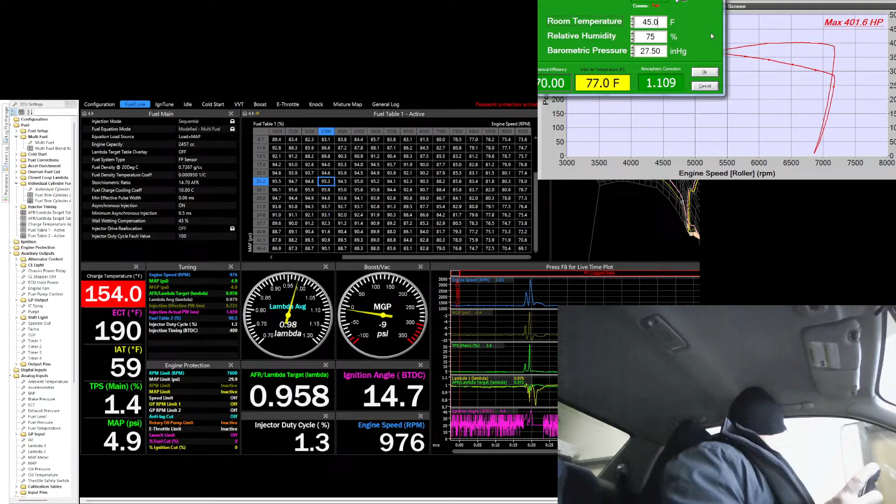I just fired up the Flex. Damn, this fucking weather station. It's a piece of crap. 45 degrees, 75%, 27.5. Yeah, those are all correct. Still correct. Thank you. It's annoying as shit. Every couple minutes, like, hey, this doesn't work. Put the weather parameters in. It's cold as fuck. It's probably actually less than 45, honestly. And that's going to correct the dyno and make it read lower. I should put the right temperature in here.

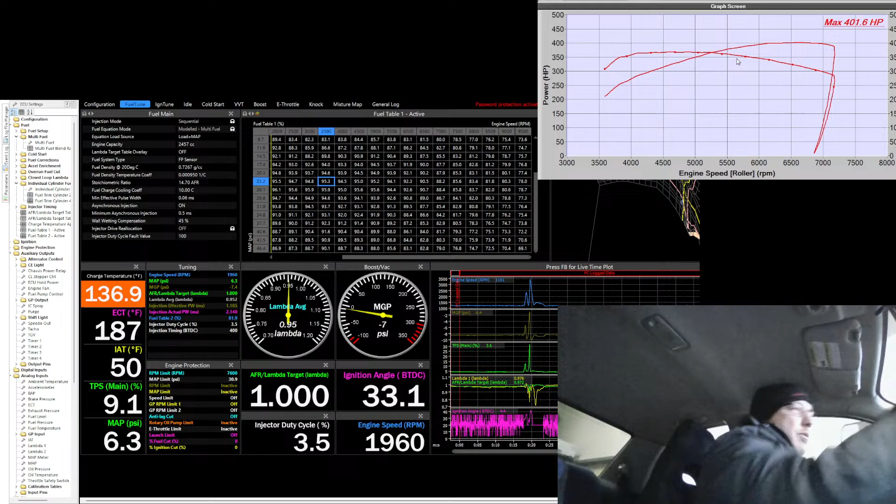And I swore already. I usually make it further than that. Yeah, it's only 39 degrees. Oh. That'll raise it up some. I don't care. Whatever. Not the point. Dyno numbers don't matter. What matters is the tune is correct.

So here we are. Link G4X. Built 2.5 liter, Kelford cams. G30-660. Tier 1 / Get It On Tune turbo kit. What else? ID 1300s. Garrett wastegate. Garrett blow off valve.

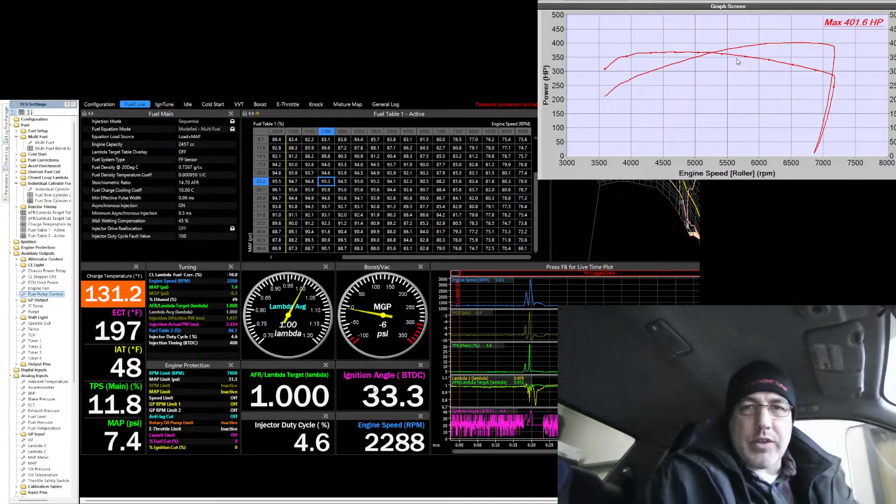Like it? Feels nice and crispy. This thing is so crispy that the dyno is having a hard time holding it back. I like that. It's crazy because it's not a ton of power. It's that where the dyno is grabbing the car to lock it down and hold it, the boost is spooling up and the torque's increasing, so the dyno's not able to hold it back. It's having a hard time.

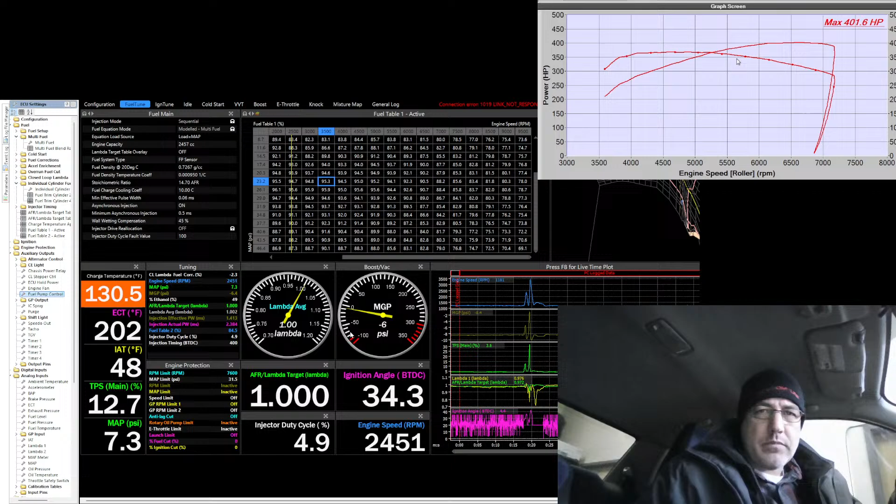So I either need to start the pull later or start the pull earlier. I might need to go earlier, honestly, because it's already got full boost by 3,500. It's already like 20 pounds almost. So we'll see. I want to watch this knock stuff here. It was really difficult on pump gas. Now that we're on ethanol, I want to see if the knock is the same.

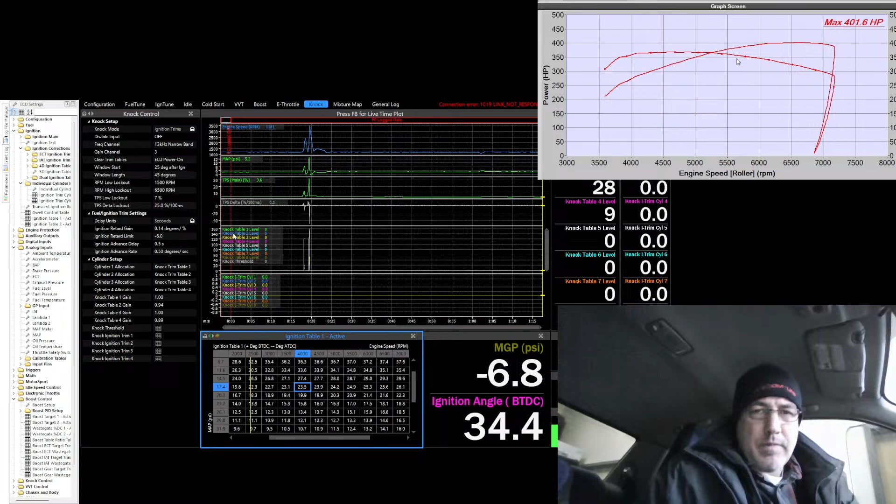I'm actually going to put the timing the same. Let me do that. It's the fuel, it's not timing. I'm going to make the timing maps identical and then see how much the engine noise changes. Because you don't always know if it's actually engine noise or if it's knock. And built motors can be a little louder. And I don't want to lift the heads off it or spin a bearing. So I spent a lot of time pulling timing out of it, and a bunch of fuel everywhere, did a bunch of stuff.

So now we're at the exact same timing maps. See how much noise I get on my knock system here on this pull. I should probably lower the boost down to the same boost level too, which was 33. So let's go right here and hit 33. And this one and hit 33, and then I'll use that to turn the boost up.

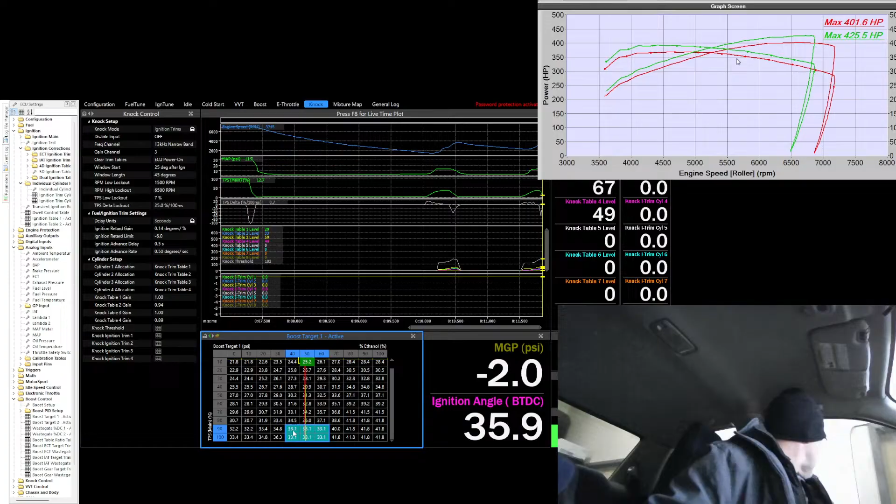Okay, so I've got flex fuel in it now, or sorry, ethanol in it now. It's about 56%, 48%. Okay, 48%. Same boost, same timing. We're gonna see how loud it is. Pretty loud, as you can see. Okay. A little bit of power at the same boost level. Let's see right here.

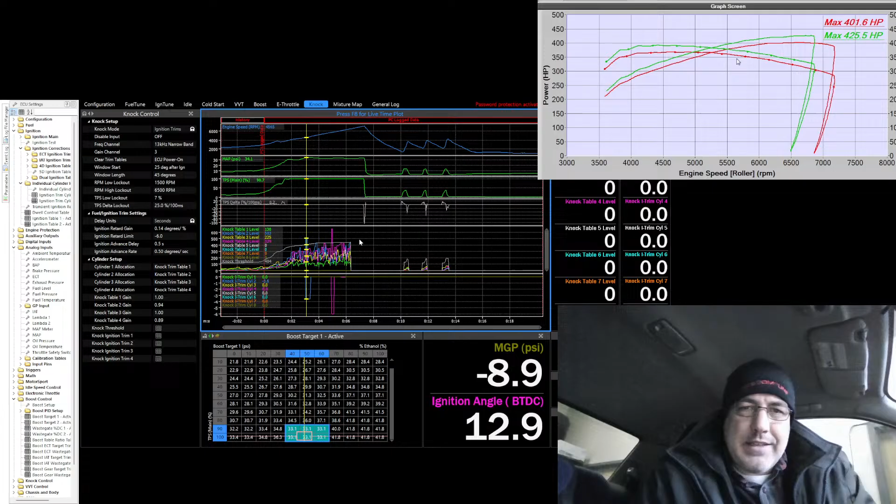Cylinder 2 there popping up, making a little bit of noise, and cylinder 4 popping. Both of these cylinders have been kind of problematic during this tune so far, and I was concerned it was pump gas or something, but it's the exact same trend now, and I got 48% ethanol in it, and the timing's the same. So 12 degrees. 12 degrees at 19 pounds at 5,600. There's no EJ in the world that should be knocking there. Like, that just doesn't make sense.

Maybe a D25 head on pump gas might knock there, but definitely not an ethanol built motor. This is B25s on this thing. There's no way. So that makes me think I have the sensitivity just a little too high on the knock stuff. But I wanted to double check that because I don't want to make it too dull and then rip the fucking head gaskets and stuff right out of it. So unfortunately, think about this.

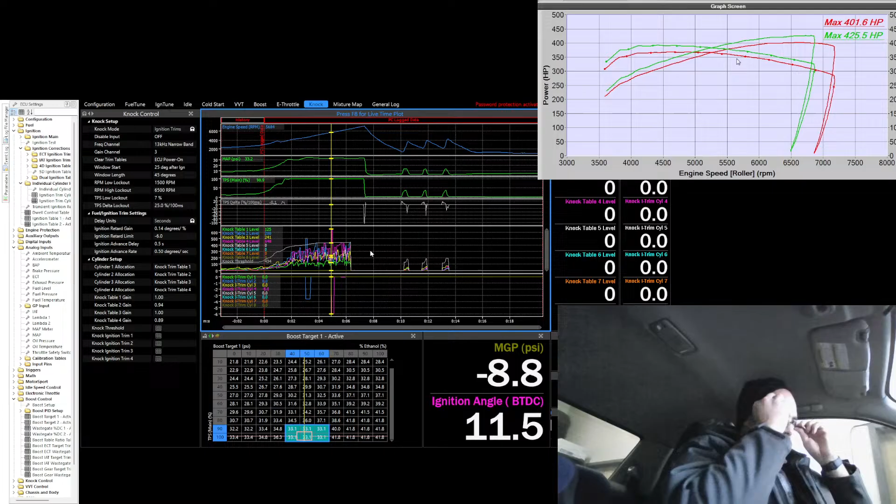I need to put that seatbelt in, don't I? I don't hear that shit. And that's just annoying as hell on the video. Alright, sorry about that.

Let's see. I got nobody in here right now, so that's fine. I don't know why I gotta keep signing in. This is stupid. Oh my god, it's still me. It's still me. YouTube. It's the same computer. It's the same application.

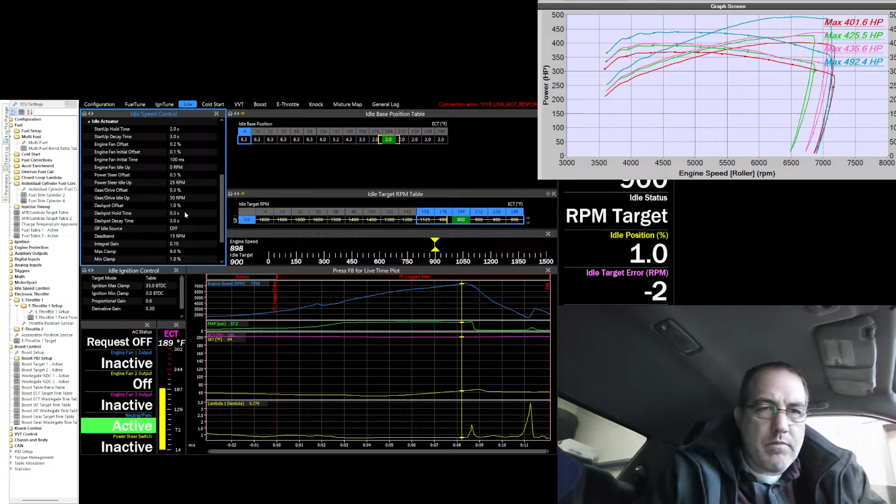Honestly, a 975 idle target with Kelford Beast, little high. Lower it down, see how it treats us. Did definitely fix that. That was too much. See, I don't like that. I don't like that the idle position is so low, that makes me feel like it's a vacuum leak.

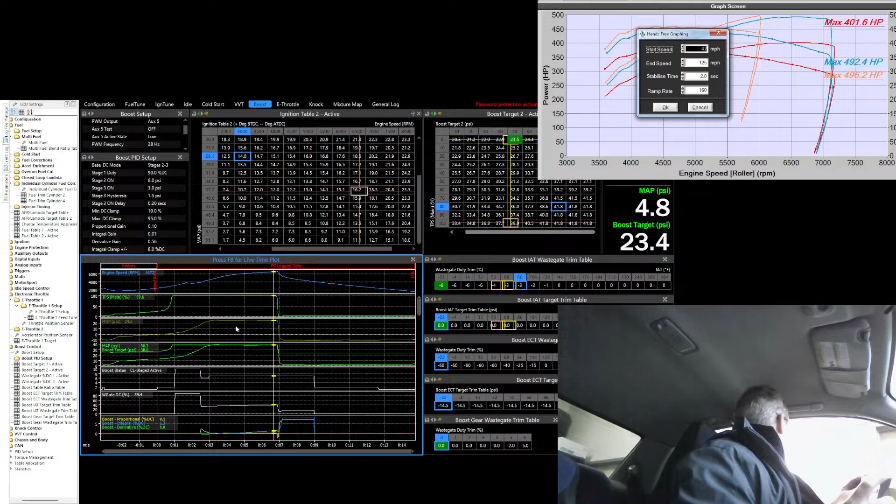I'm going to change the start speed on the dyno to be a little earlier. Get 40. That's going to change the boost threshold, the shape of the curve, and everything, honestly. But I'm going to do it, see what happens. Oh no, that might have been clutch slip.

Throttle fault. Interesting. Throttle. Says E-throttle fault. Huh? E-throttle fault. Oh. The last pull, I aborted because it felt like it had slipped the clutch. But I should probably check. Now, TPS says it's there. But I don't know. Kind of confused right now. I'm going to see if I figure it out.

It shows TPS main and sub are both 100%. The motor current hit 80 and stayed at 80. So maybe because it was at 80 for too long? Because typically it goes up and it comes back down. It's like an overcurrent thing. Yeah, maybe. See, our max clamp is 80. Let's go to 90, see what happens. It's at 500 hertz, which is factory Subaru frequency.

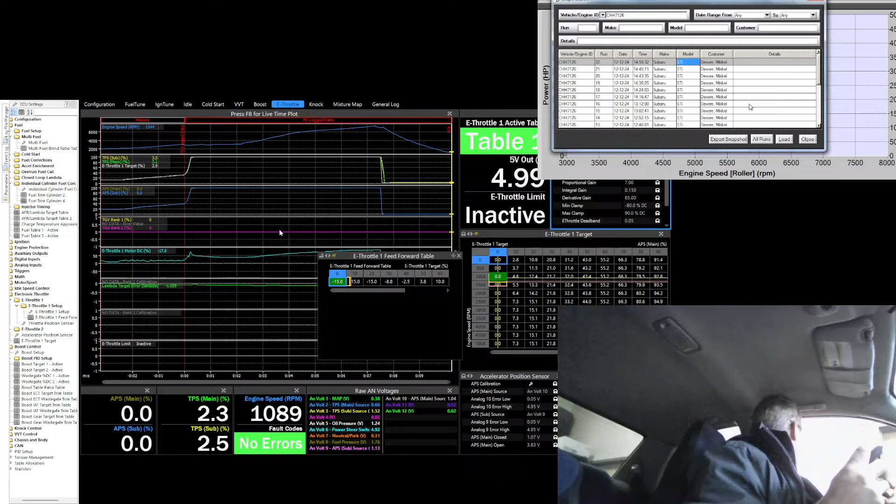Man, I don't. Okay, feed forward's at 35. What's it actually running? 38 up to 70. Wow, it keeps going. Look at that. So the current is going up with the boost. The boost is trying to slam shut that throttle body, and so it's needing more current to hold it open. See it really climb there. Throttle body feels a little weak, honestly. It makes you wonder if it's having some issues.

That's pretty interesting. Feed forward wise, you can see it pops up the current. The position is not quite 100. It gets there decently quick, so I could probably add more to the feed forward. It looks like it's falling a little short before it does that. So the 100% feed forward could go up a little bit. This guy right here. Yeah, that could be closer to 45, 50, honestly, as a start.

Get it closer, a little more. Quicker to react. How's this going over here? Fucking cylinder. Like, look at that. So I've pulled 3 degrees out of this cylinder, 3 degrees out of this point. And at this point, on 48% ethanol, we have 11. So that cylinder currently has 7 degrees of timing on it, and it's got almost 5% more fuel than the other cylinders, and it's still that freaking loud.

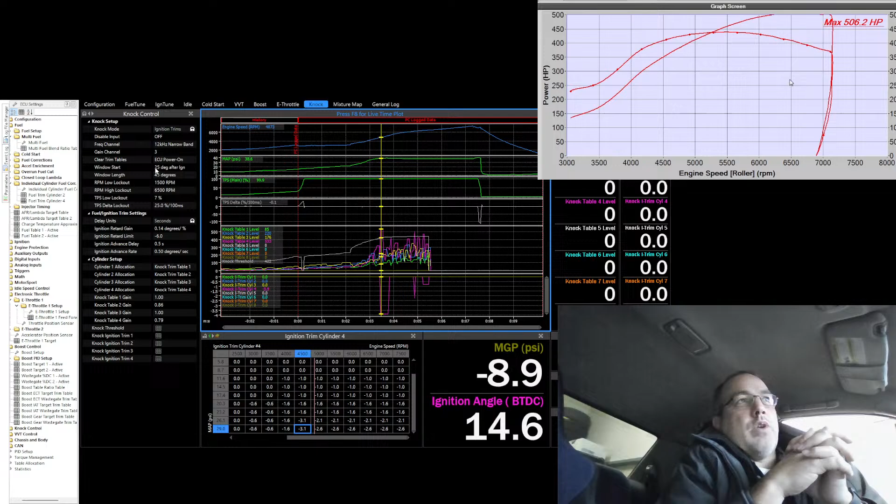Window starts 25 degrees after ignition, so let's think about that. That's basically 5 degrees after top dead center. No, it's later than that, because of our timing being so retarded on cylinder 4, and our timing is only 11 degrees right there. So that's actually like 15 after top dead center. So at that point, what's happening? Exhaust valve should already be shut by now, so no exhaust valve noise. There shouldn't be any noise from valves happening in that region. So any noise that we hear is things rattling around, or not. I can't see it being knock though. It just defies all logic.

But look at that dyno graph. That is so smooth. I can't believe how smooth it is. This dyno doesn't have options for smoothing. If it's jagged, it's jagged. So it doesn't look like it's that undertimed. It doesn't look like it's having knock issues. It doesn't look like there's anything wrong. That's just a beautiful curve on this thing.

We look at air fuels. Air fuel, right here, and that's almost flat as a board. A little wiggle at the top end. I mean, that's great. That's a good AFR for pump gas, even 11.5. I like to run a little richer than that, and this one is richer. And our boost comes in like that. Look at that. It's like a tabletop, like a plateau. Everything is beautiful on here.

It's just that it keeps pulling timing on 4. I mean, shit, it pulled 4 degrees here. So it's got 4 here, plus 3 here, so 7. It's got 4 degrees of timing on cylinder 4 right there.

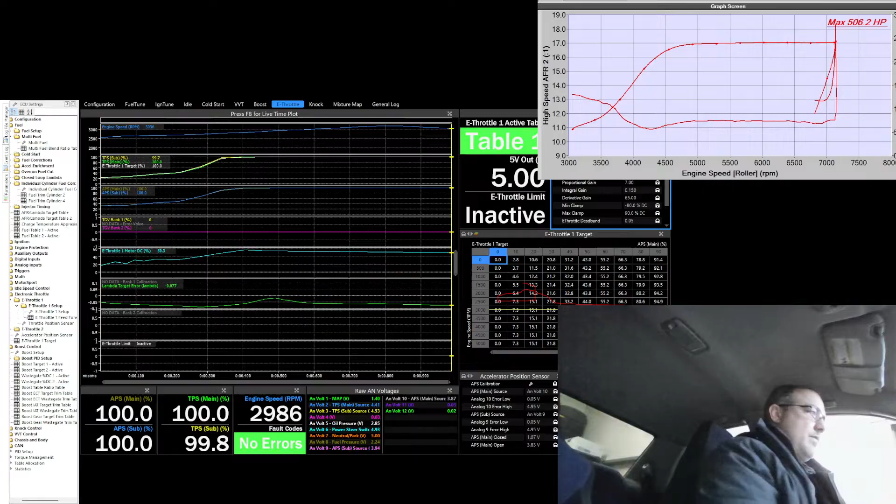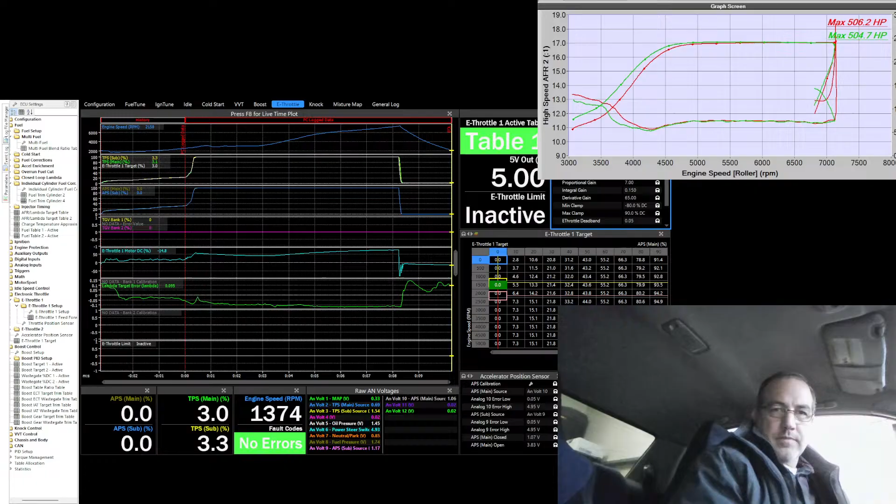You can change the frequency on the drive-by-wire and see how much that alters the current. Try that. I'll do that real quick, see if that changes the current. We go to 750. See if we get a current drop, or if it goes up. About the same, 70 to 80. That didn't change much at all there. Still the noisiest cylinder.

Looks like I got that threshold pretty close. Could have gone a little further. Obviously, 3 to 2 is different to 50%. Well, 2 to 3 is an addition of 50, and 3 to 2 is about 30. But I got that pretty close. But that guy's still making noise on 4. Don't like that it's that noisy.

Fuel trims 2%, 5% right there at the onset. That works for me. I mean, I'm running 0.76, 0.77 lambda on this on ethanol. It's 18 degrees up top. 10 degrees in the mid range. 25 pounds of boost right around there, 24 up top.

One thing to keep in mind now is that 24 pounds of boost on a car with cams is like 28 to 30 on a car without cams. You got to keep that in mind because the airflow changes. And boost is a function of back pressure. So for the same boost level, you will get more airflow and therefore more power than before. So don't look at this and go, oh, there's no way he's making that much on only 24 pounds. Well, it's got cams in it and ported heads. So that's going to improve the power for the same boost pressure than what you can see in another engine that doesn't have those things.

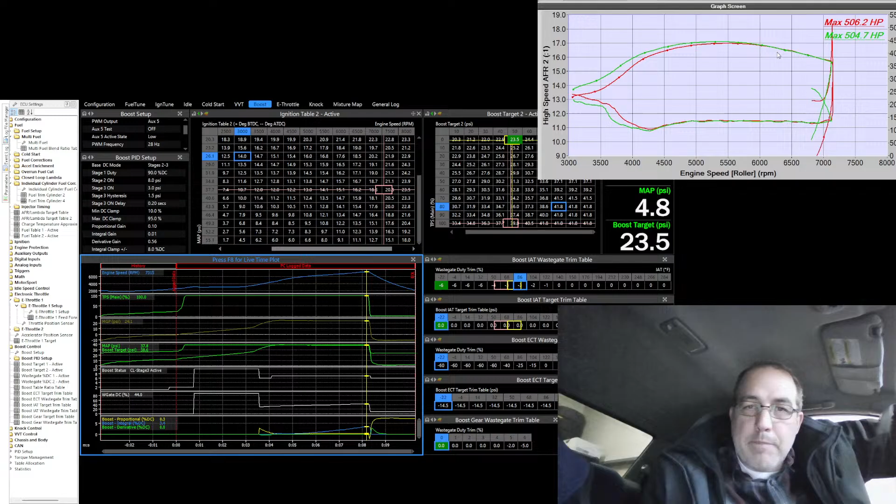You'll see that the torque is nice and flat and low. Doesn't have the EJ spike that we often get. And more importantly, it doesn't have it even on a turbo that spools this fast. Look at that. I mean, here is, what was that boost there? Well, forget the boost. Let's look at the torque. 250, almost 300 pounds of torque to the wheels here. What's that? 270 pounds of torque at 3,200. And yeah, so it makes a lot of torque across the whole power band. I think we're good.

And I bet we're 82% duty cycle on our injectors too, probably, right? 80.2, 81, 80.7, so 81%. You can run these injectors harder and longer. That's not a problem. Our differential fuel pressure drops a couple psi, but not bad. It looks like the fuel pump's keeping up just fine. And let's see. What else we got? No more dip in the voltage like we had before. So I'm starting to wonder if that throttle was why we were getting that voltage dip on a couple pulls there. And everything looks really good. Honestly, everything looks really good.

The only thing I don't like is the VE. On pump gas, the VE was down in the 80s, and I went through all the settings to make sure that it made sense. And it is. It's down in the 80s. That was a little difficult. I was like, why is it so bad? Yeah, I went through all the settings: injectors, displacement, fuel model, the temperature, the densities, the fuel mass, the fuel density, the fuel pressure. I went through everything, and it just is running a lower VE up top. And now that makes sense.

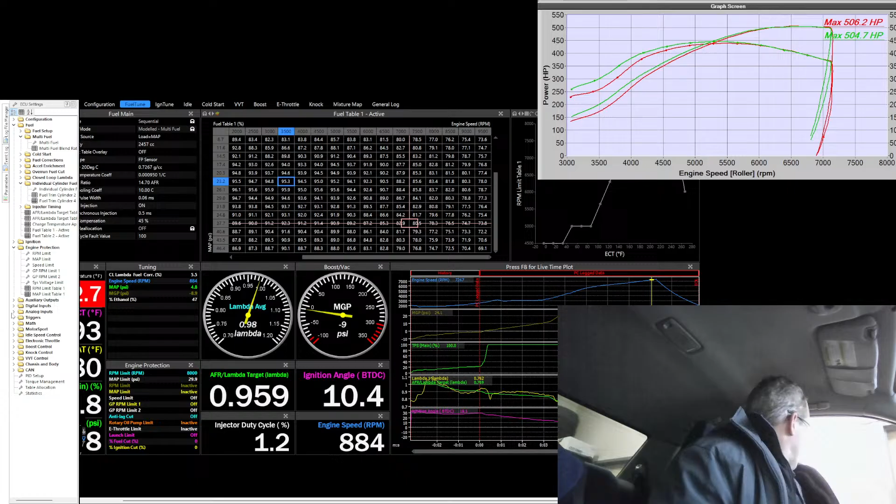Kind of want to put another degree or two up top in it, to be honest with you. Kind of want to put some more timing up top. Kind of want to do it on cylinder 4. Cylinder 4, it's got so much taken out of it. Right here, on the very top. Right here, kind of want to, oh, that's fuel. I want to give some back to cylinder 4 up top. This is 0. And just fade it in like that.

And then you go to my ignition table 2, and up here it's 65. Right here, yep, exactly where I want to do it. And a little bit there. That's it. That's all I want to do.

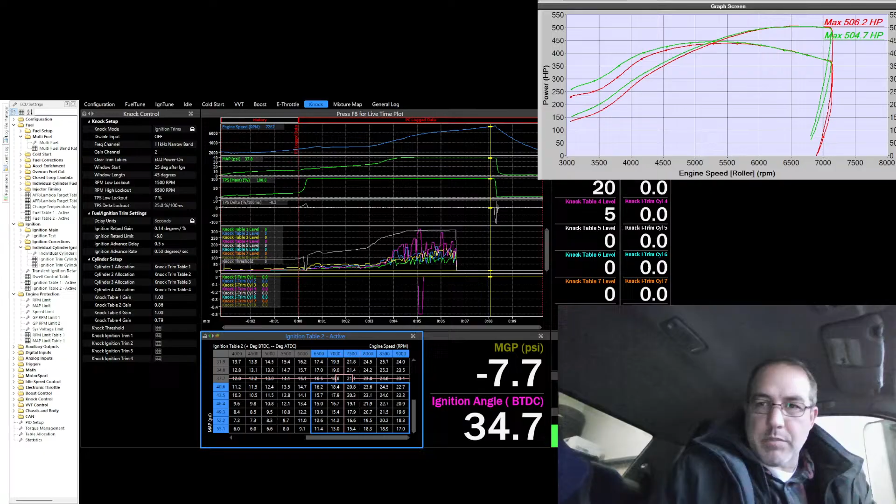Pull the window up and see if it changes the way the mic picks up the car. We'll do this. See if that's a little better. See if it peaks out as much or what.

What's your concern? 203? That's not hot. 203 is normal operating range. Fans don't even kick on until like 205 on the factory. So that's not a concern. I run a 205 thermostat in my car, and it loves it. It does great up there. Thing gets good fuel economy. Has less engine wear. It performs better on ethanol. Yeah, it's great. I love my high temp thermostat.

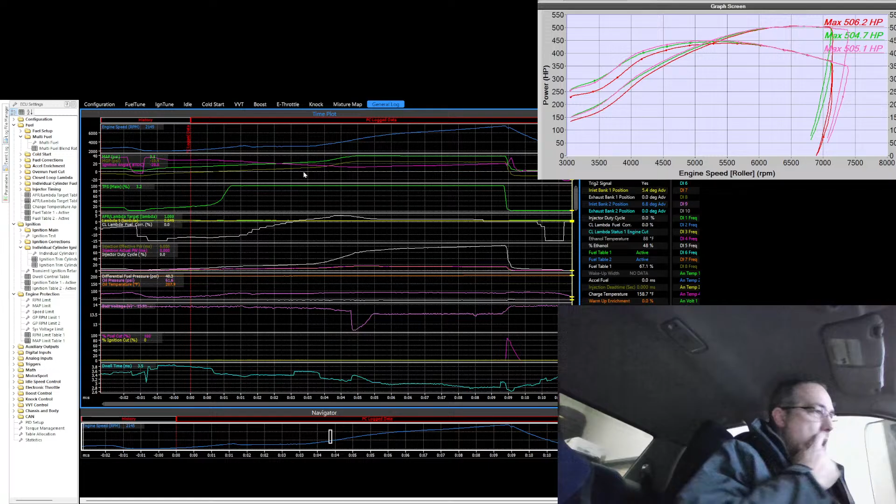All right, now what do we see? Power didn't go up, so I didn't need the timing. I mean, 1 horsepower is not... I only added 0.3 degrees, but I did add 2 degrees to cylinder 4, and power didn't go up. So sometimes the timing an engine wants will surprise you. You'll think that it should want a lot more than it's taken, and not always. It can definitely surprise you.

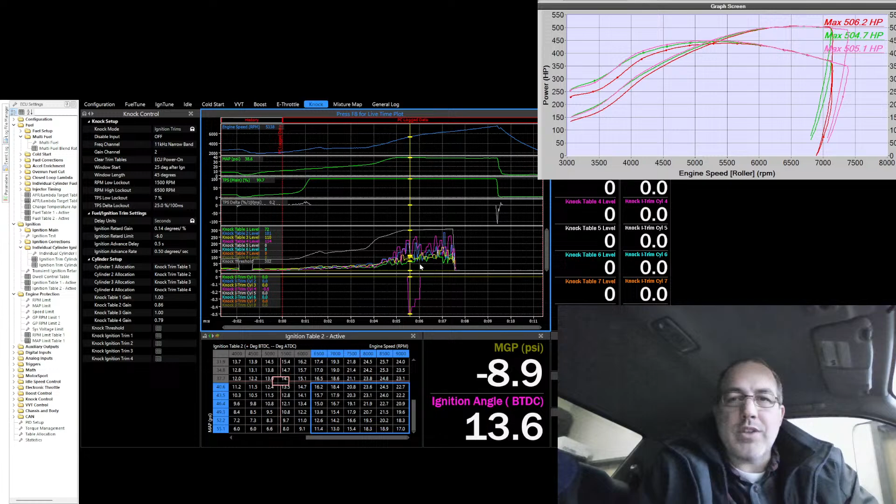Let's go to the knock page and see what happened up in there. What the fuck? How did I do that? Oh, because I didn't clear it last time. Right. Didn't clear. But that doesn't matter. That's a 5500. Yeah, so 20 degrees at 75 made no difference from 19 degrees at 75. Power was the same. And there's that voltage drop again. It's still there. Just occasional bloop. It's weird.

82.7% of fuel injectors. .77 lambda, pretty much across the board. Little wiggle here and there. Looks good. Fuel trim's less than 2% through the whole power band. That looks good. But you can see there, did it need the timing? Doesn't seem like it. Nothing went up. Nothing changed. Nothing was beneficial by adding that timing to the engine.

And even cylinder 4, no more power was made by adding that timing. So I'm taking it back out. It was happier on pump that way. I'm not putting that much there, though. I'm going to take it back out here, this region. Fill that in. That I'm going to bump back in a smidge up here because knock doesn't really occur up there on RPM. Okay. So that. I think good. I think I'm done with this car.

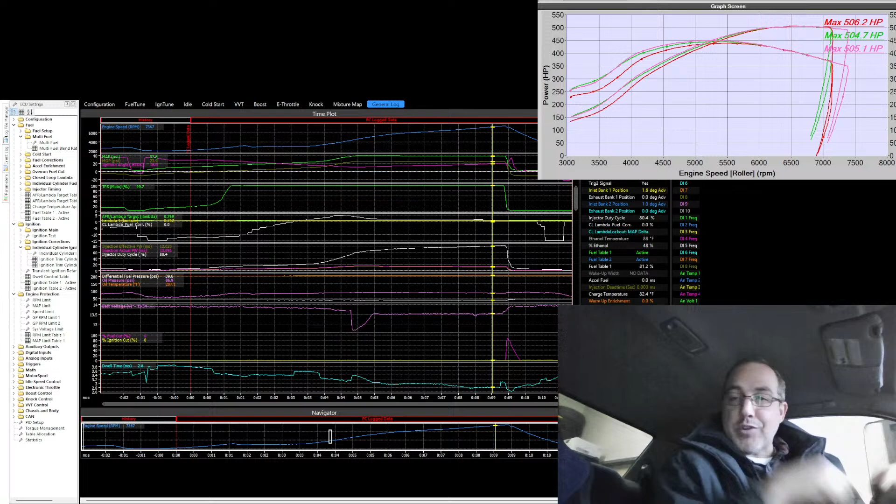So having a vapor enter the chamber is way better than having a stream of fluid shooting in, clearing the valve, hitting the back of the cylinder wall, the crown of the piston, or whatever, and chasing the piston down the bore. So I'm also a closed valve injection person.

Now, as injector duty cycle gets to be 80%, you have no choice but to be injecting while the intake valve is open. You are injecting 80% of 720 degrees. So yeah, a large portion of it is closed valve, but you are definitely injecting open.

So some people will set an end of injection instead of a start of injection on their injector timing to force it to be as much closed as possible. But what can happen is if you approach that 100%, you will have an injector not firing during a portion of the piston going down and open up, and then all of a sudden another pulse happening, which is bad.

I spoke to Paul Yaw. Is he saying about DI? He is not going to do DI. He has no interest in doing DI injectors. That's somebody else's market right now, and he's not interested in doing it. The biggest reason being that it's really, really easy to adapt different port injectors to different ports and different intake manifolds and all of that. It is not something that you can do with direct injectors.

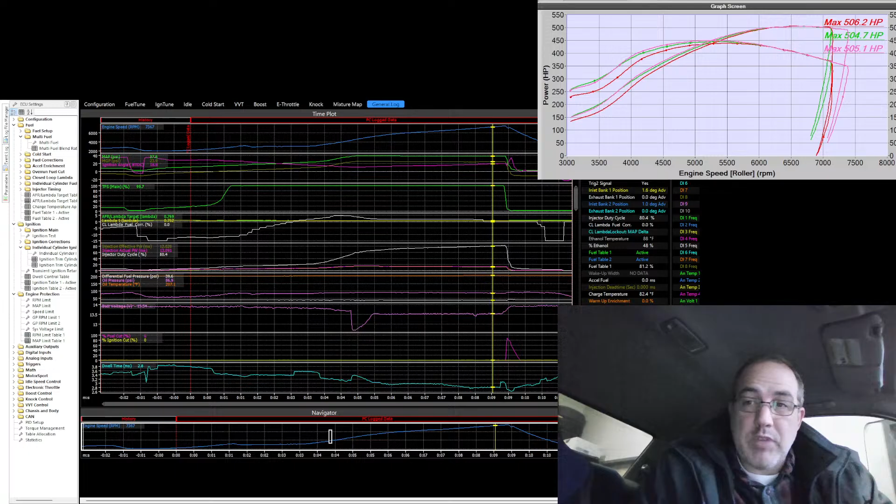Anyways, I appreciate you guys for hanging out on this abbreviated tune. Hopefully, you still picked up some good stuff and saw some things that might make you go, oh, well, I'll be damned. 10 degrees. That's not bad. Okay. That kind of stuff.